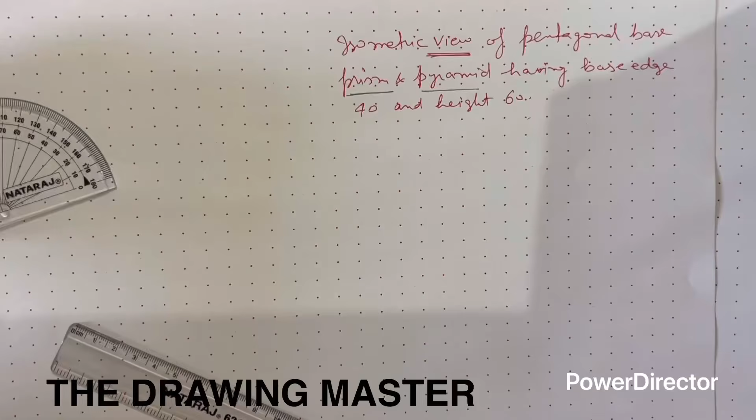Hello friends, in this video we will discuss isometric view of pentagonal base prism and pyramid having base edge 40 and height 60. So we will draw the isometric view, not projection.

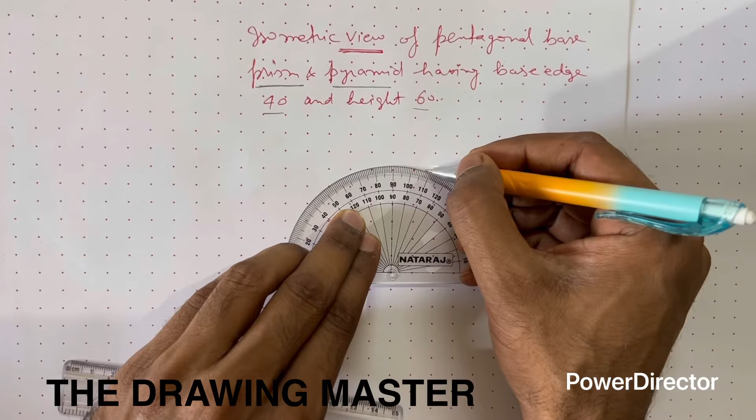So let's measure the angle. This is 90, 100, 105, 6, 7 and 8. Measure this angle very carefully. Right? This is 108 degrees this side. You can draw one thin line here. Similarly from here, now we'll draw the same angle.

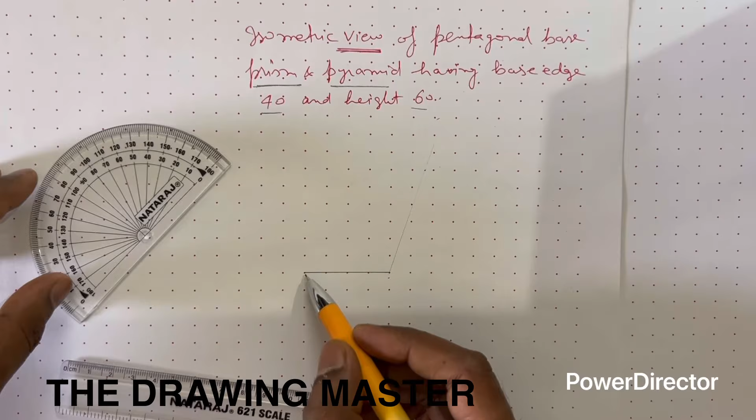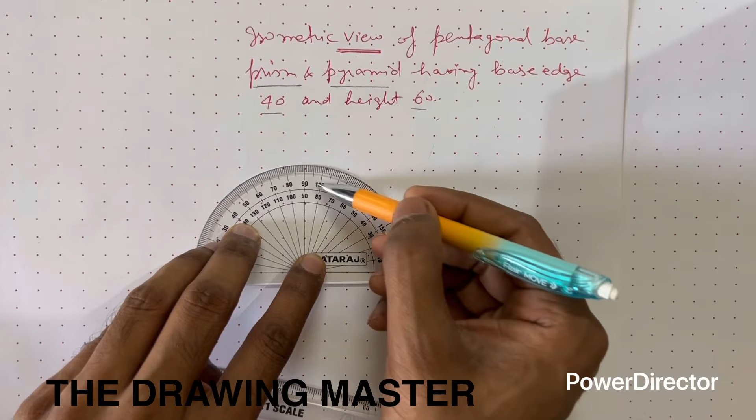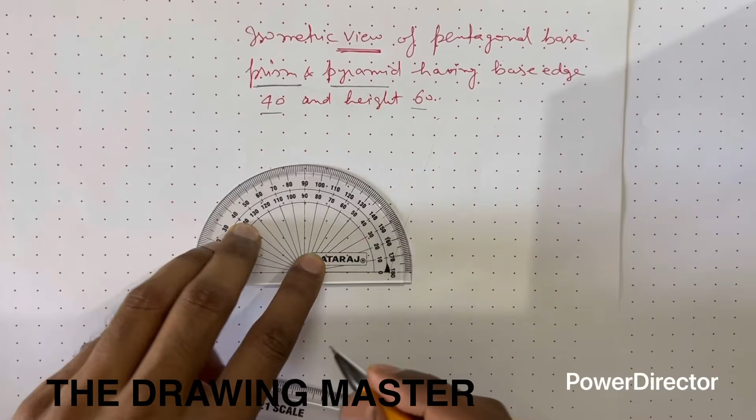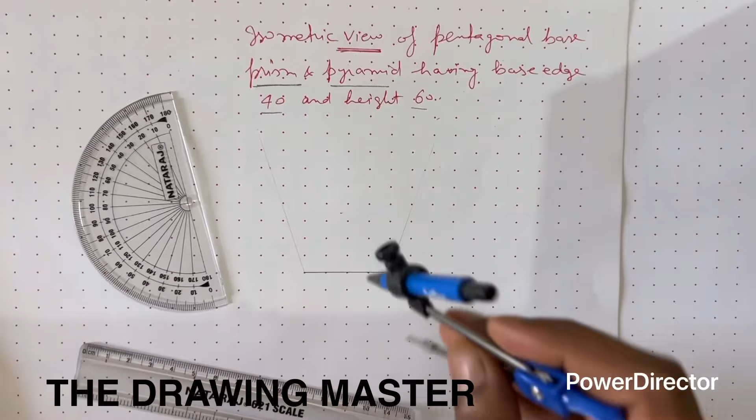Set your protractor at the origin. So now this is 0, 90 degrees, 100, 110. So just 108 we need. Right? Here also you can draw one thin line. Now for a regular pentagon, all the sides should be 40 mm and all the angles should also be the same.

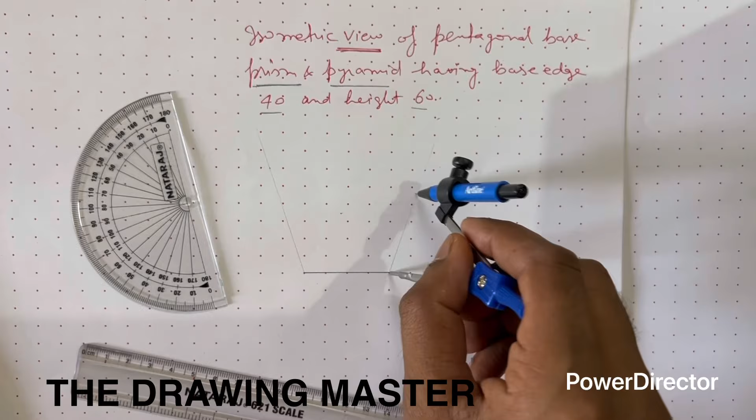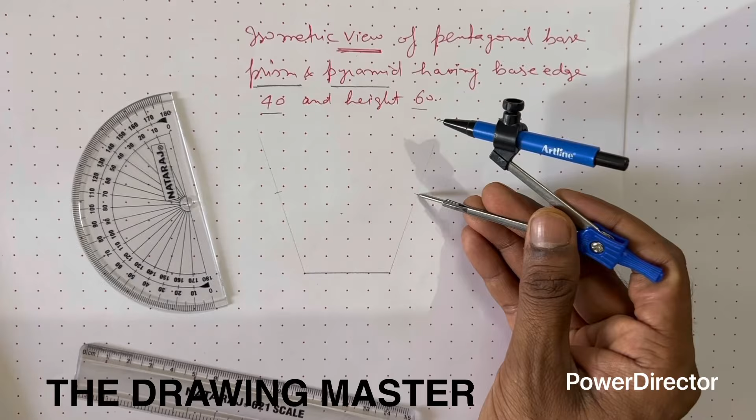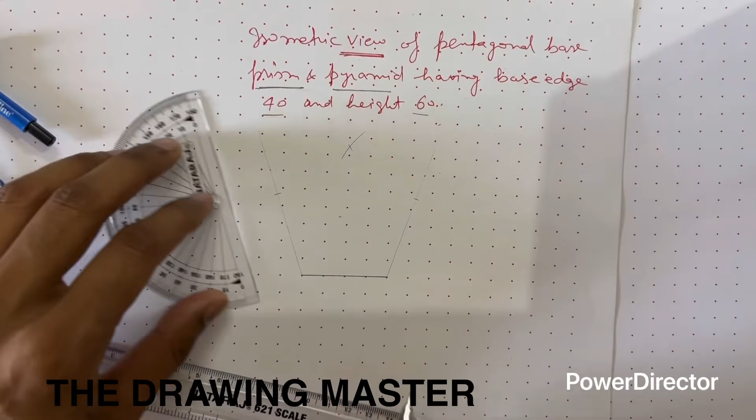This is 40. From this side, take 40 on this line and 40 mm on this line. This is 40, 40 and this is also 40. Now from here also we need 40 mm. So take an arc of 40. And from this intersection take 40 mm. Now you can join all these points. You will get a regular pentagon of 40 mm.

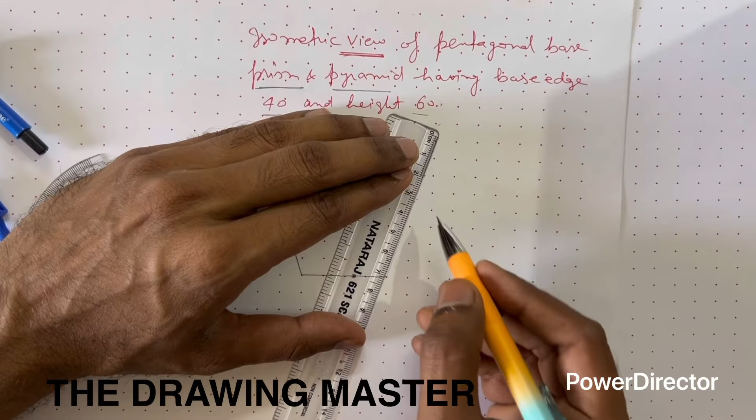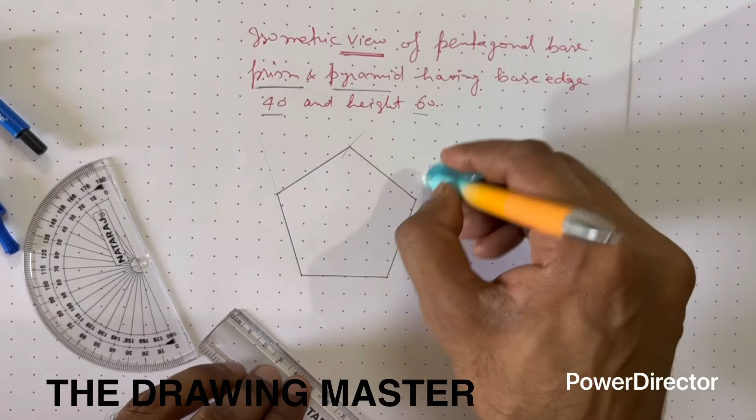Now this is the regular pentagon. All the sides are equal and all the angles are equal. This is the 108 internal angle.

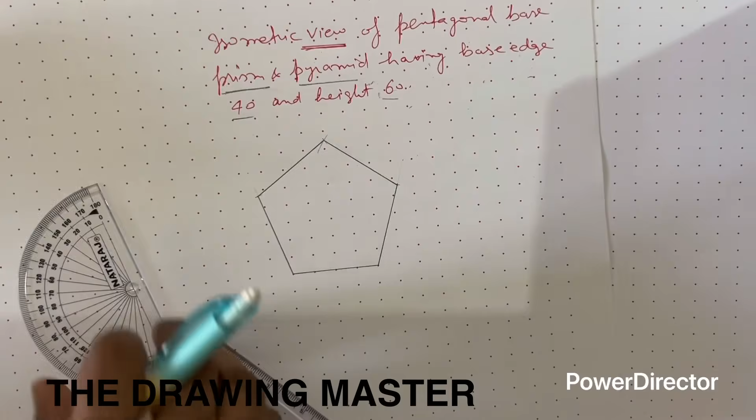If you want to verify your pentagon, you can just rotate your sheet and verify it from all the sides, like from this side, from this side, from this side. From all the sides it will be the same, or symmetrical about the vertical axis. So you can see this is a correct pentagon now.

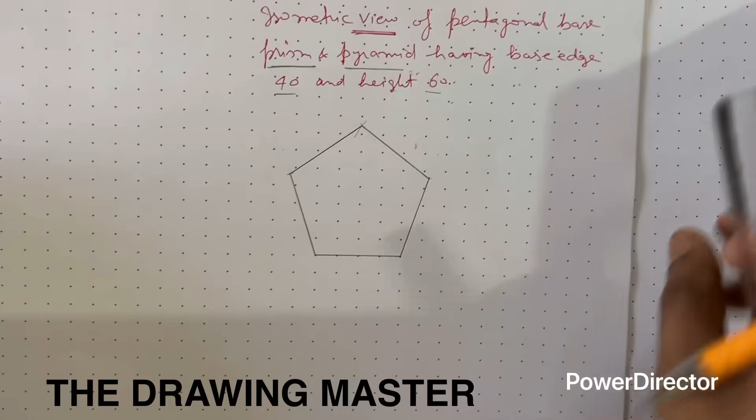Now the second step, enclose this pentagon into a boundary. So here there should be a vertical line. Just draw one vertical line on both sides. You can take the help of the dots to draw the vertical line, because if the lines are not vertical, your frame size will be incorrect.

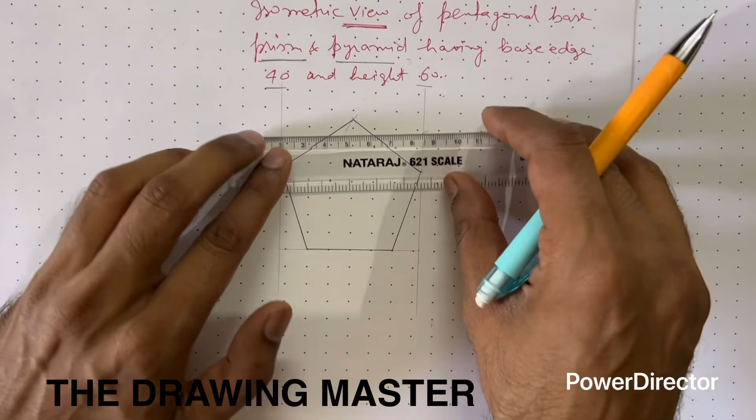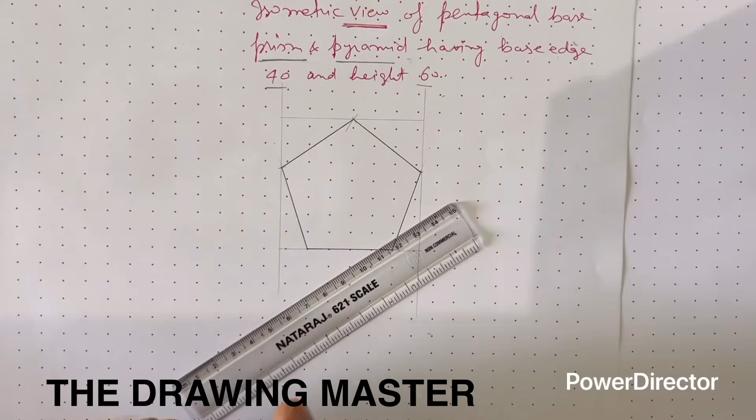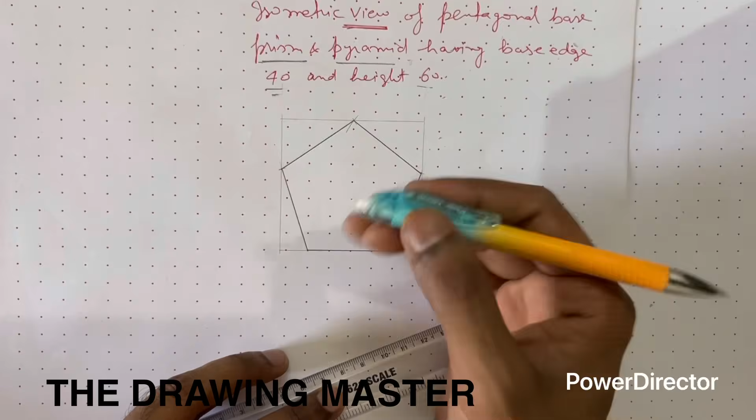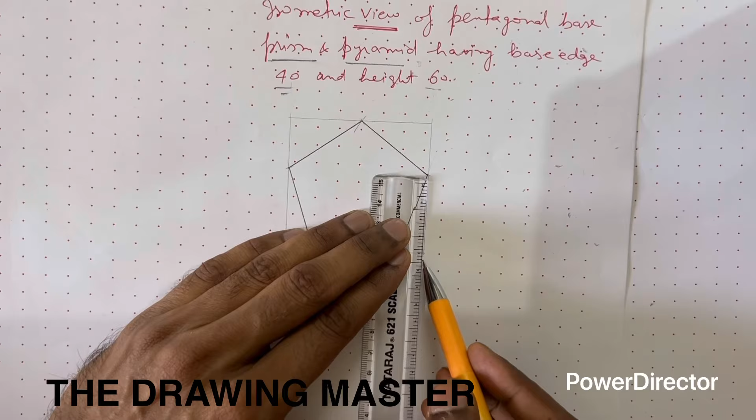So this is the boundary of 4 sides. In the case of a pentagon, there are 5 sides, 5 edges, but now we have enclosed this into 4 edges. Let's measure the size also. This is the third step. Take an extension line, draw the dimension line, measure the dimension. So this is 65.

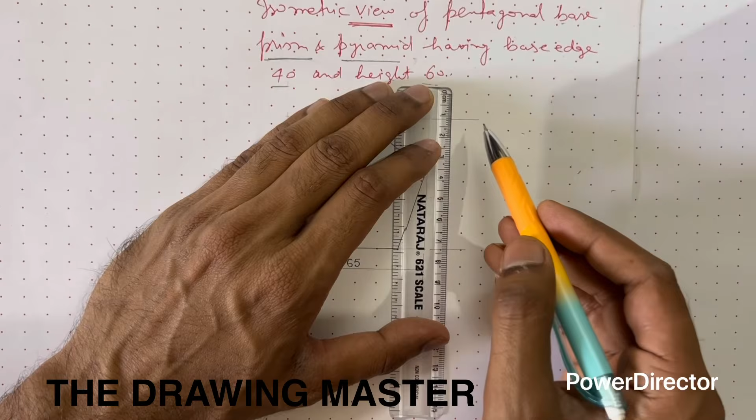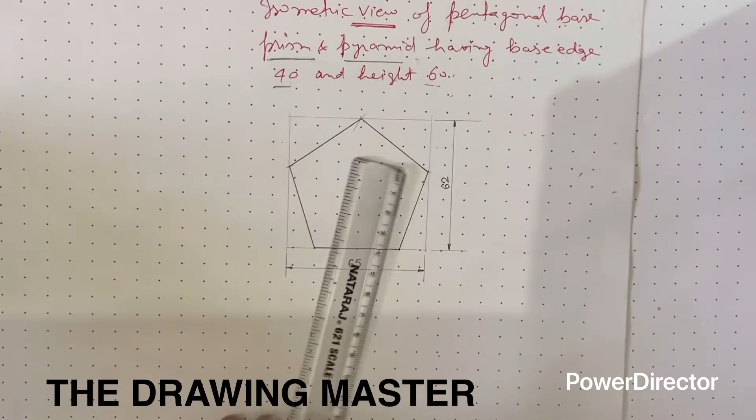So here you have to write 65. Now measure this second dimension. So this dimension is 61.5. So we'll round it to 62, because maybe there is some error, so we'll take 62. In manual drawing this amount of error will be there. So this is 65 and 62.

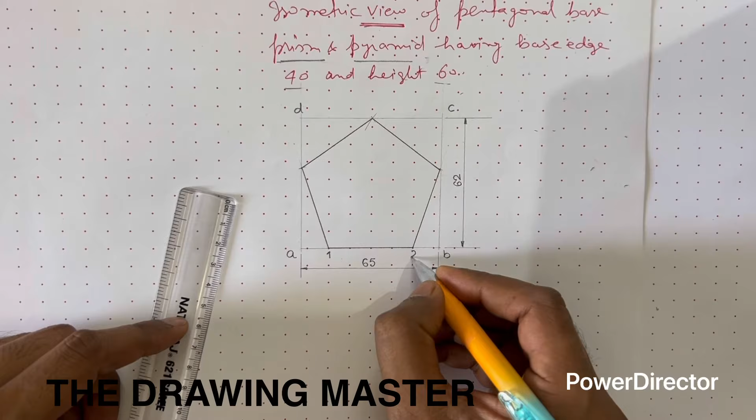Let's write the names of all the corners: A, B, C, D. Now we'll label the 5 vertices of the pyramid. This is 1, 2, 3, 4, 5. These are the 5 vertices of the pyramid. Now the isometric view will start.

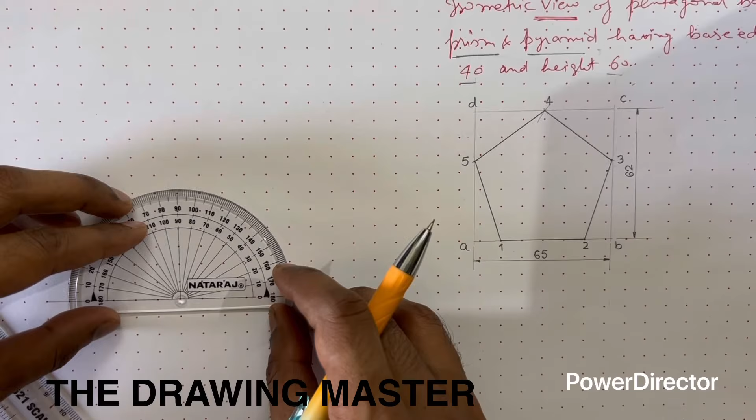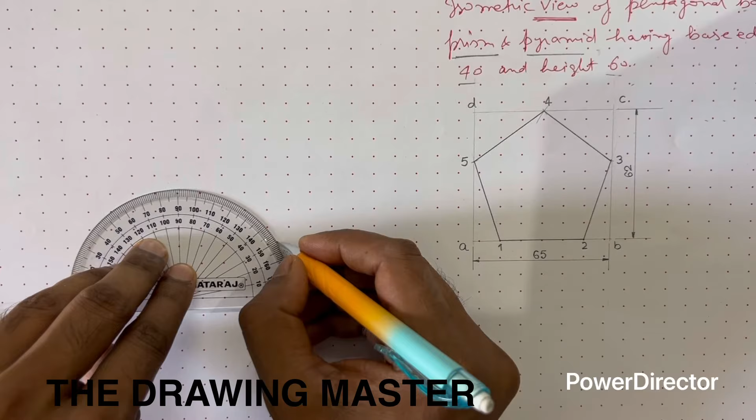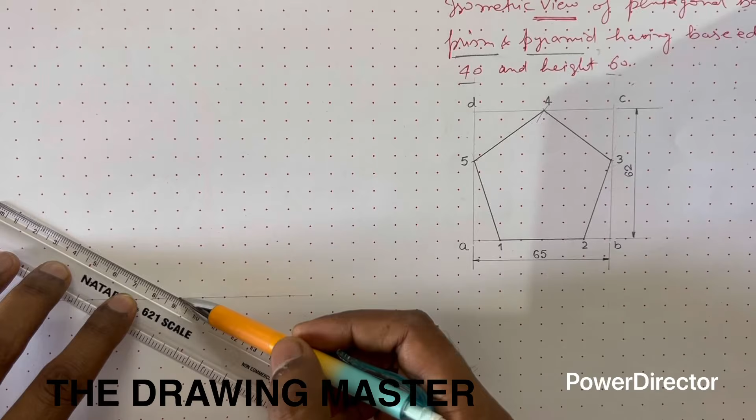So for the isometric view, first we have to draw the reference line. Take one pole point. As usual, like other drawings, you always have to draw 2 lines at 30 degrees on both sides. 0, 10, 20, 30, and similarly 30 degrees this side, right? These are the 2 isometric lines which represent the length and width of the object.

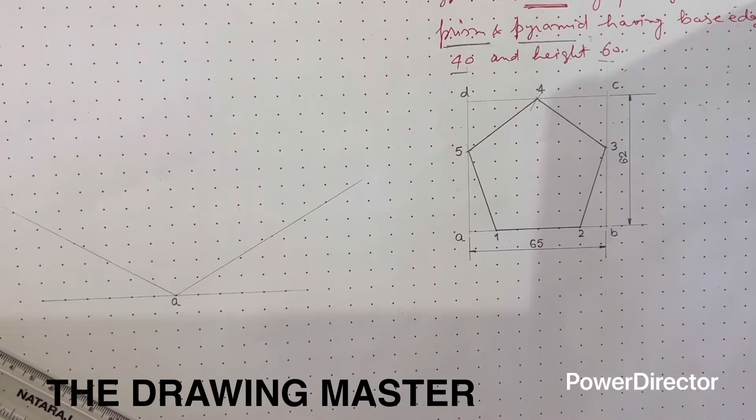So now we'll convert all this drawing into the isometric view. So how to convert this? Let's fix point A as a pole point. So if this is A, here we should have B. So let's measure the dimension AB.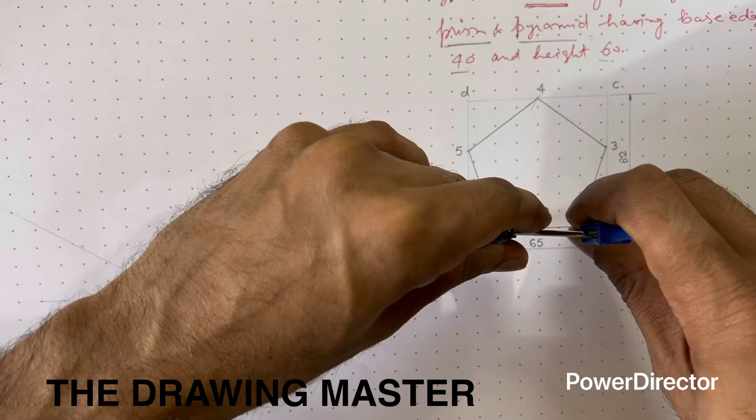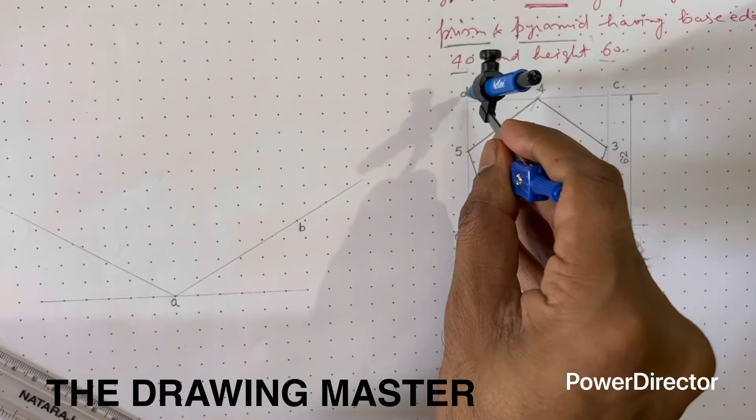This is B. We have transferred the B. Now AB is done. Now we want to draw AD. We have to draw AD. So let's measure AD. AD. Now this is point D.

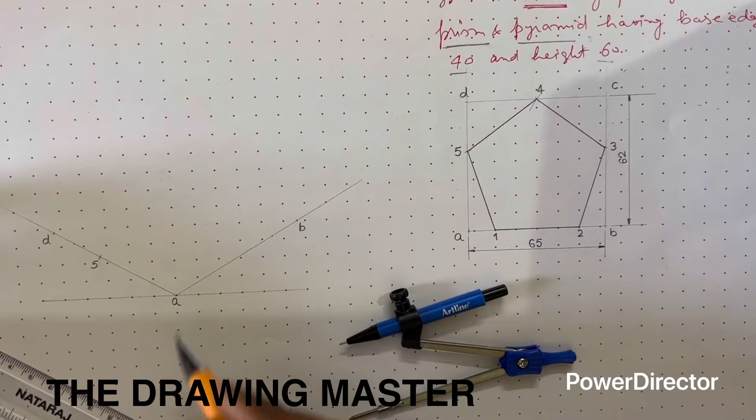One more thing is there. You can also transfer A5 from A. You can measure A5. So let's write here. This is D and this is 5. Right? Similarly here we will transfer 1 and 2.

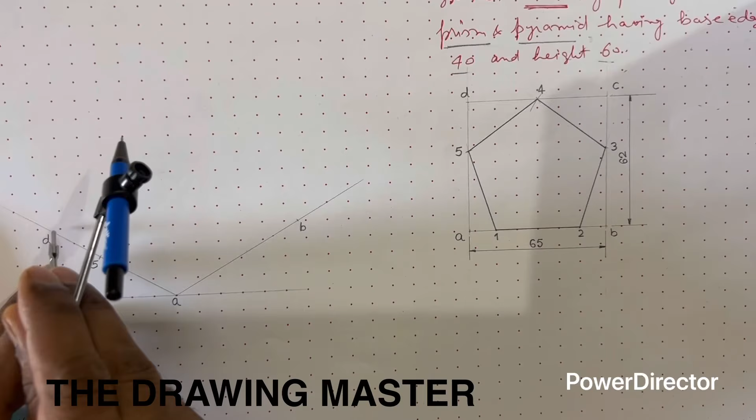Let's draw the next point, C. DC. So DC, we will copy it from here. DC is 65. DC. So take an arc from D. Now on this arc, point C will be there.

Now we have to draw BC. To measure the dimension BC. So from B, take an arc. Now you can join this. Now this is the line BC, BC 62 and DC should be 65. This is 65.

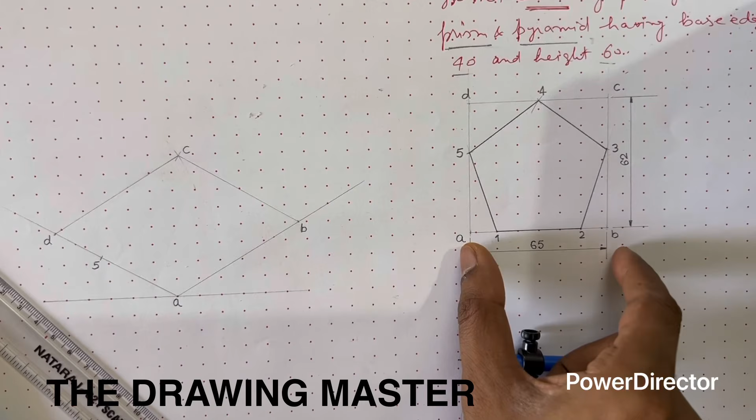Right? AB, here it is equal to this line. AD 62, this is 62. Then DC 65, so here it is 65. And BC is 62. So basically we have transferred all the dimensions here at a 30-degree angle. Now let's transfer the points. So point 5 we have already marked. Let's mark the point 3. So point 3 is lying in between B and C, somewhere here.

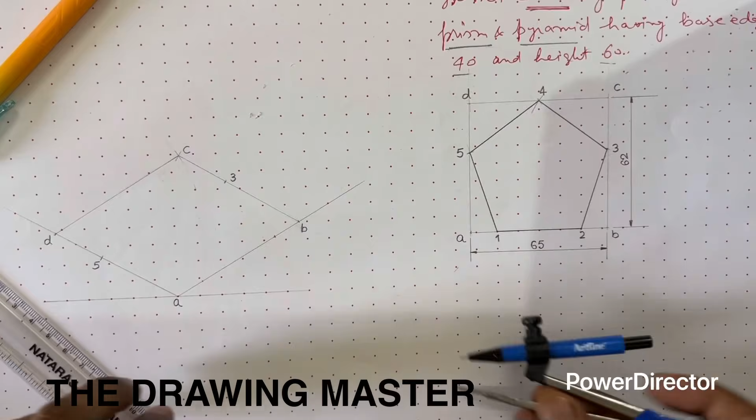So let's measure B3. B3. So from B we have marked the point 3. Let's write here 3. Now A1 and 2B both will be equal because both the side angle and dimension are the same. So A1 and 2B both will be equal. So copy this dimension A1. Now A1 and 2B. This is 2. Same dimensions, same points we have transferred, we have located here.

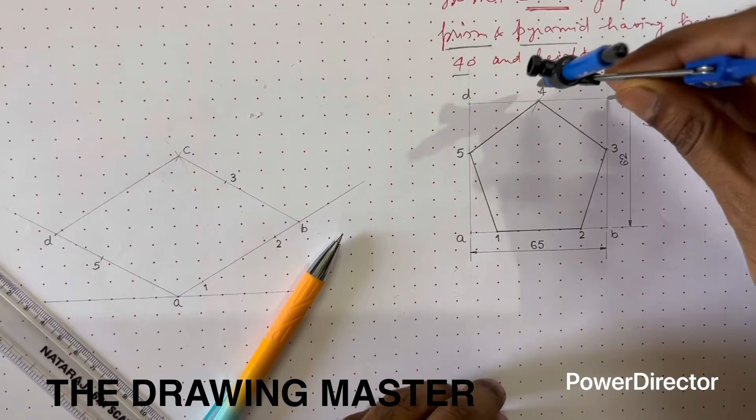Now point 4. So point 4 is at the midpoint of C and D. So you can measure it from either C or D. So now this is C4. So this is point number 4. So now we have located all the points. So finally we will join all the points to get the pentagonal base. Initially we'll follow the thin lines here. Once the outline of the object is confirmed, then we'll use the thick lines.

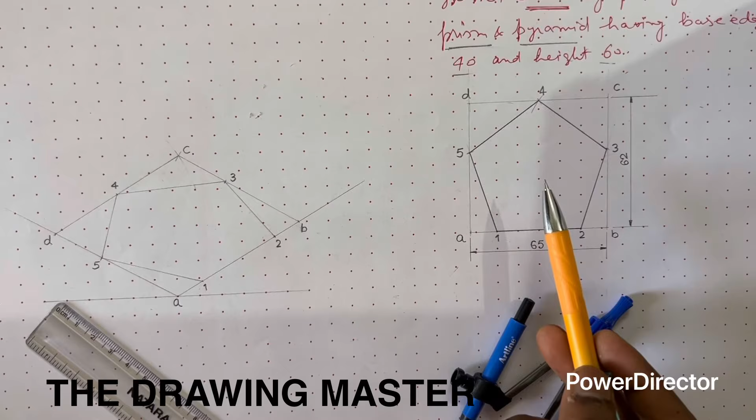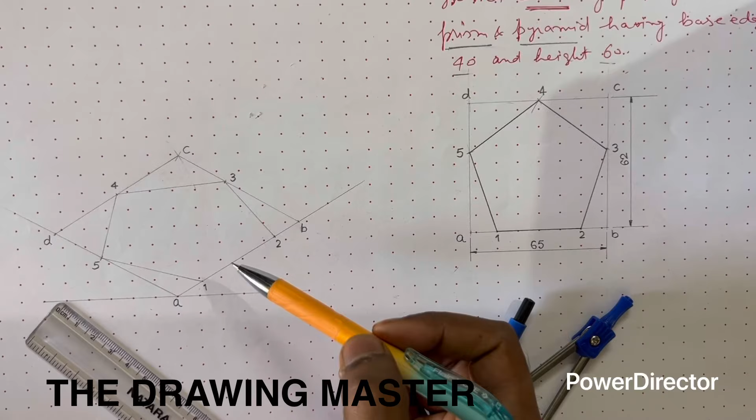Now you can see this is the top view of the pentagon, 2D view, and this is the isometric view of the pentagon, same pentagon in isometric. So now the next part of the question is prism and pyramid. So if you want to convert this into a prism, you have to take the vertical height from all the 5 vertices. But if you want to make a pyramid, like a pyramid of Egypt, then you have to take the height from the centroid.

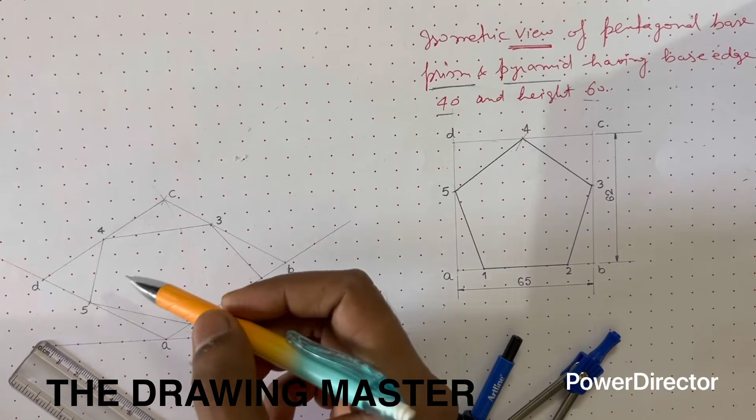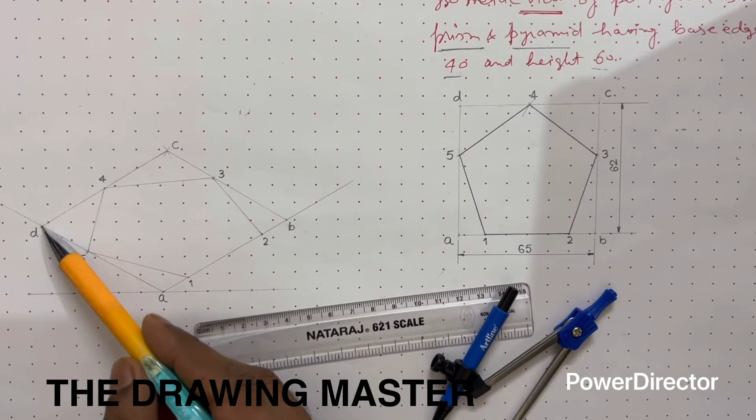So let's see how to find out the centroid. To find out the centroid, you can bisect any 2 lines. See, sometimes we think if we join the diagonals of the isometric view of this rectangle, we'll get the centroid. No, that is incorrect. In that case, we'll get the centroid of the rectangle. Even that is not a correct presentation of the centroid. We'll see how to find out the centroid of this pentagon.

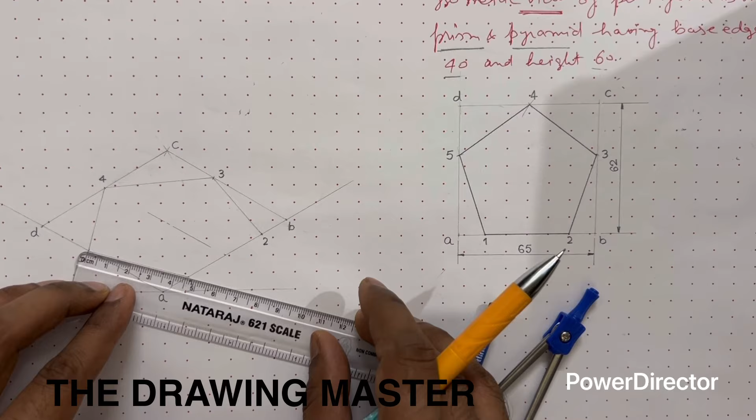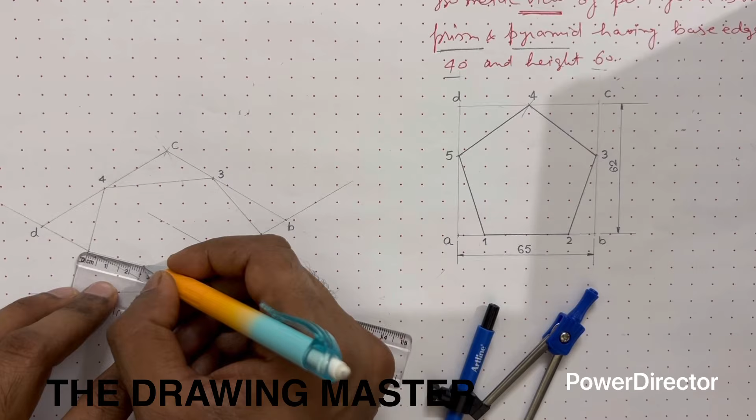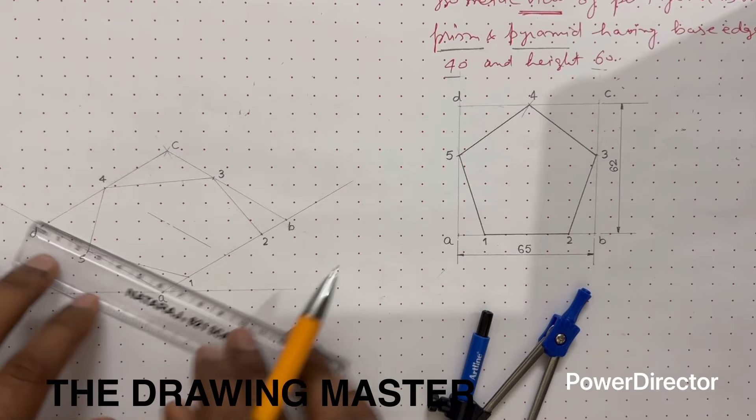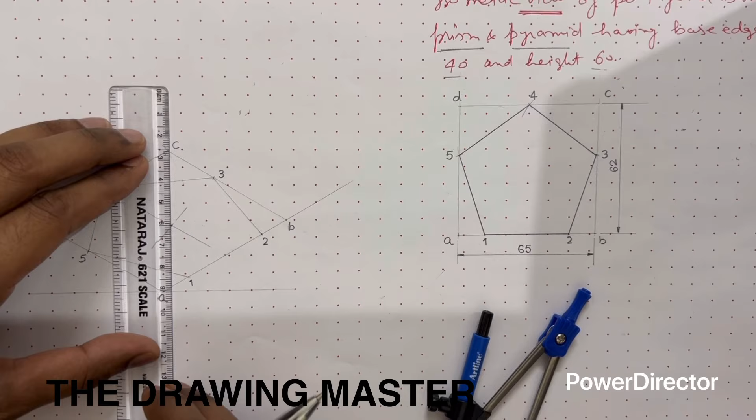So half of 46 is 23. So here is the midpoint of this line. This one is the midpoint. This dimension is 46, so half of 46 is 23. So in the isometric plane, draw one perpendicular here from 3. Now this is the centroid of the pentagon. From this centroid we have to take the height. So now the height is 60. So you have to draw the vertical axis of 60 mm here.

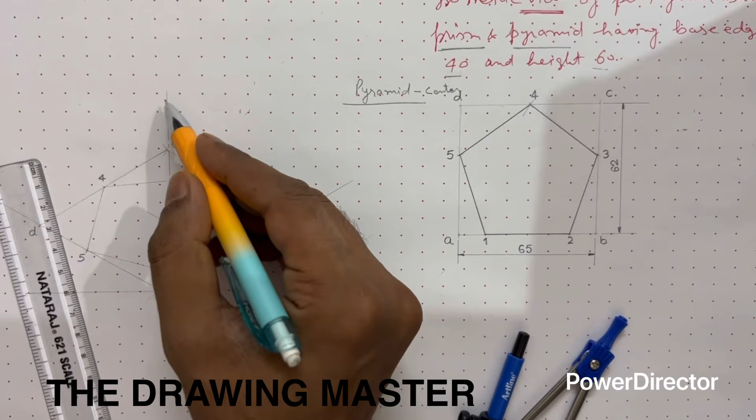So now if you want to make a pyramid, take the height from center and join the apex with all the 5 vertices. Join this apex with this 4, 5, 1, 3 and 2.

In case of prism, you have to take the height from all the 5 vertices. So let's take the height of 60 mm from all the 5 vertices. See, here you have to be very careful while taking the line. Don't get confused. The line should be exactly vertical line. This is 60 mm height.

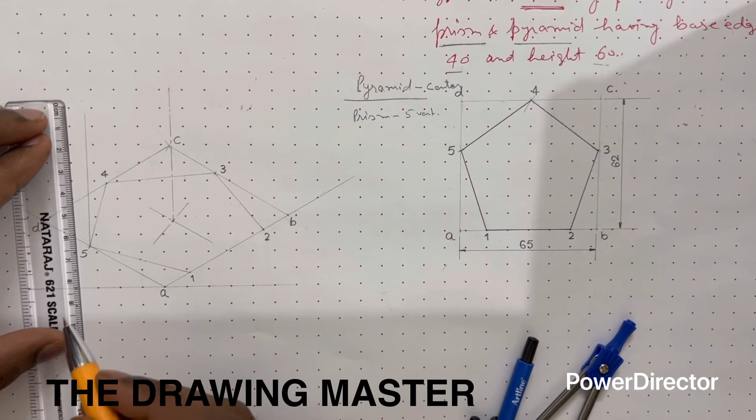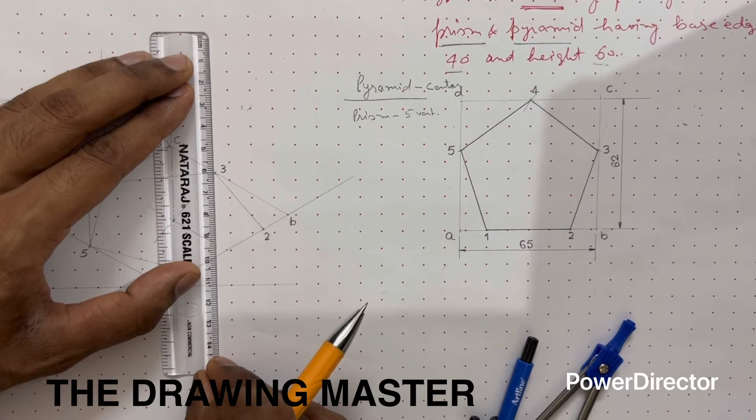Now point number 4 will take the 60 mm height. Align your scale with the dots. If you are making these lines with the help of drafter, then you have to set it only once. 60. Now from here you have to take 60. You can see here I am spending few seconds here because I know if one line is incorrect, all the object will become incorrect.

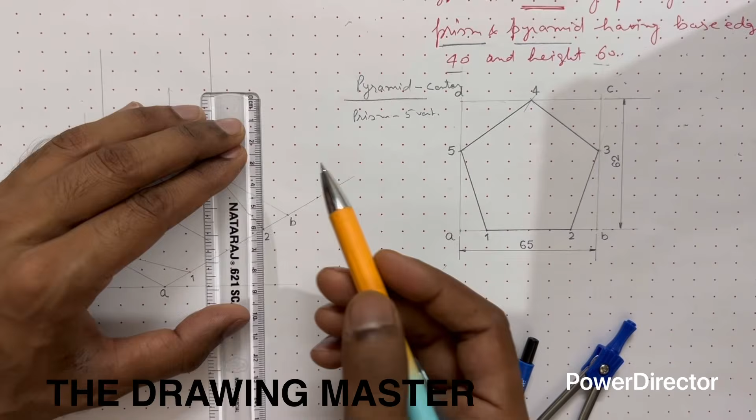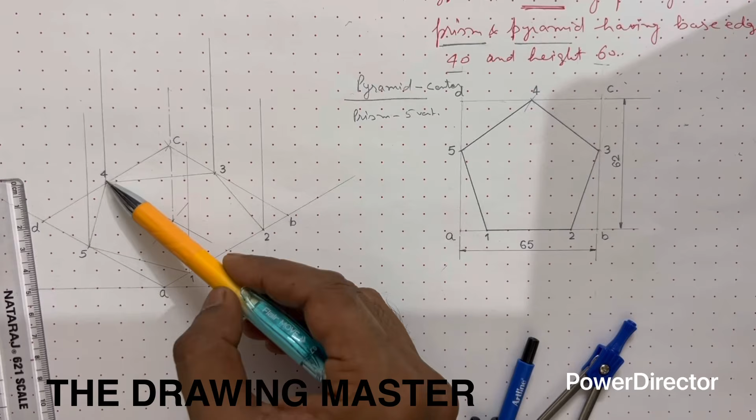Now, just like a construction of building, you can see the heights here. Have you seen the construction of building? So just similar to that, these are the 5 columns of the construction. This is 1, 2, 3, 4, 5, and this is the centroidal axis. So if you want to make a pyramid, join this apex to all the vertices. But if you want to make a prism, join all the endpoints. So I will make the prism here, pentagonal base prism.

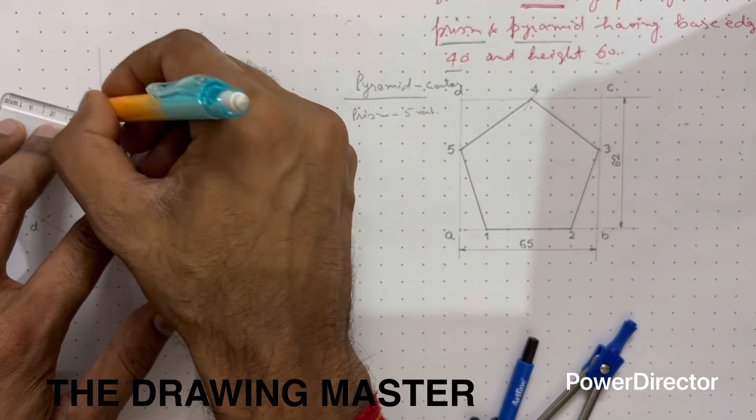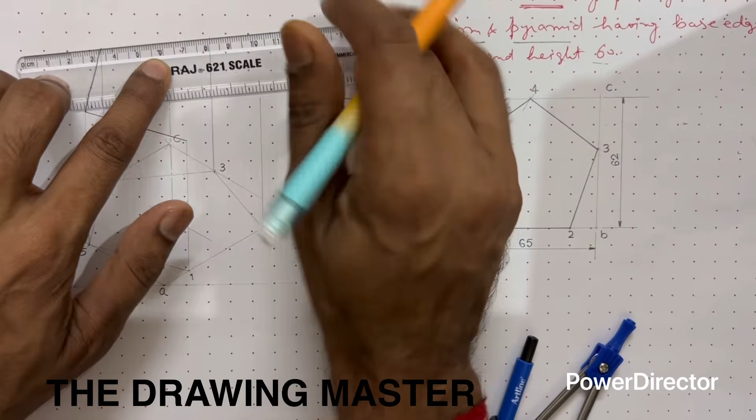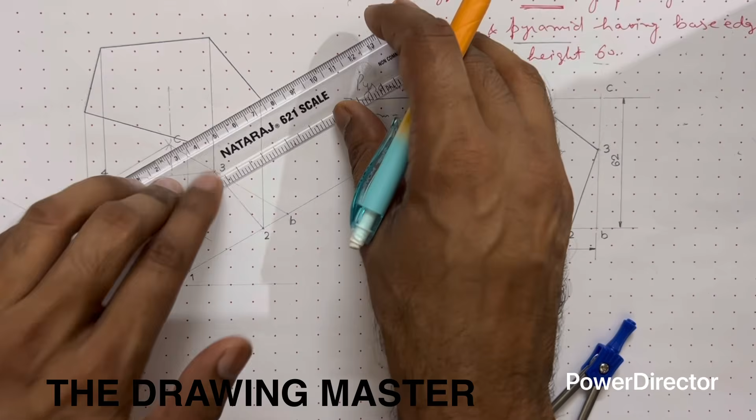At the height of 60 mm, you will get the same pentagon now. Now this is the pentagon at the height of 60 mm. So we'll convert the outlines in the thick line. The visible outlines should be continuous thick line.

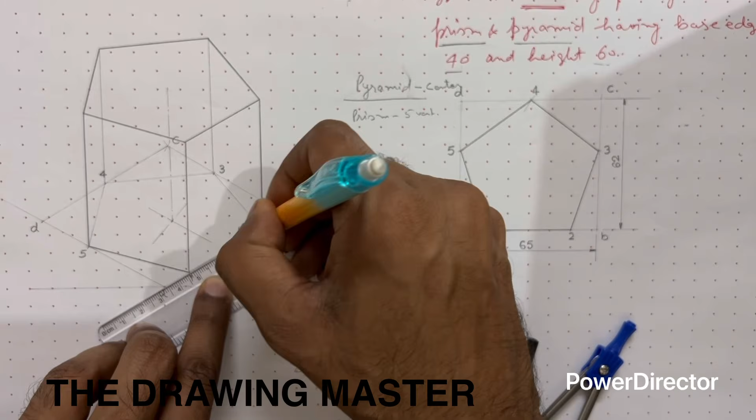Now this is the isometric view of pentagonal base prism. So dimensioning is also very important here. This dimension AB and AD we have already mentioned here. So we'll write this dimension 40 mm. So place your scale at 30 degree.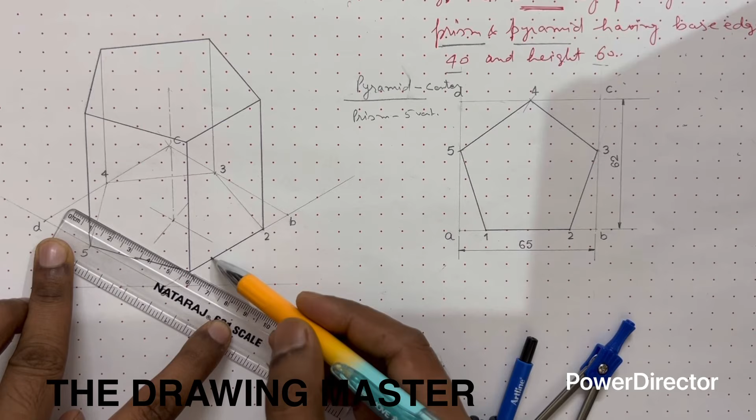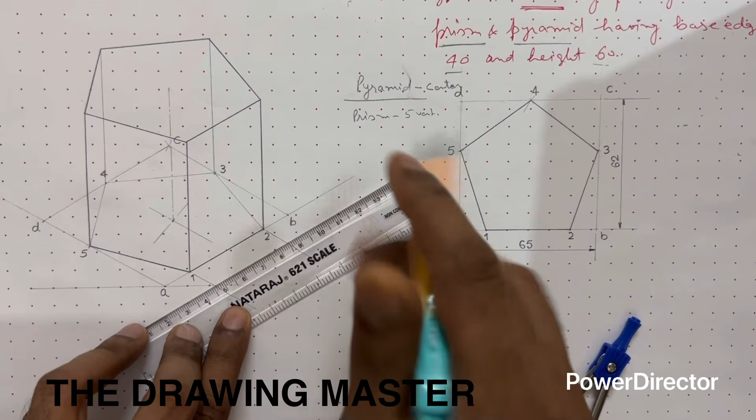See, based on my experience, I have aligned this scale with this line that you can see through this transparent scale. So most probably it will be 30 degree. If you are unable to draw, then you have to measure this. With respect to this edge, it will be 60, right? Now the scale is parallel to this edge, which is already at 30 degree. Now dimension line should be parallel to the object line. This dimension is 40.

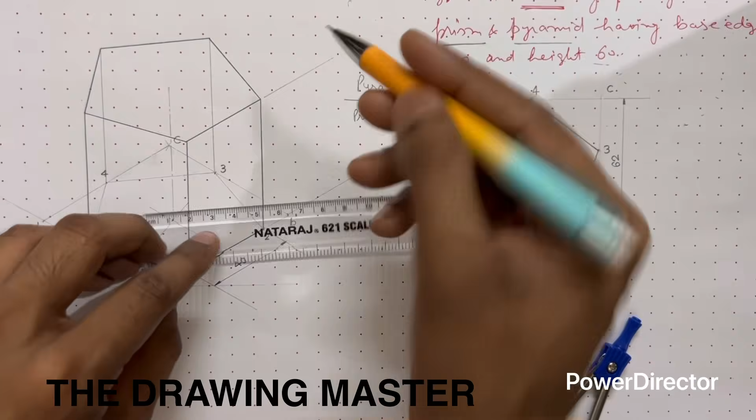So if you want to write the height, this is the vertical height, this is already vertical line, and this edge is already at 30 degree. This one is already at 30 degree. So here you can take the extension. Now this is the dimension line. You have to remember extension line and dimension line will be always at 30 degree. And height will be always vertical line.

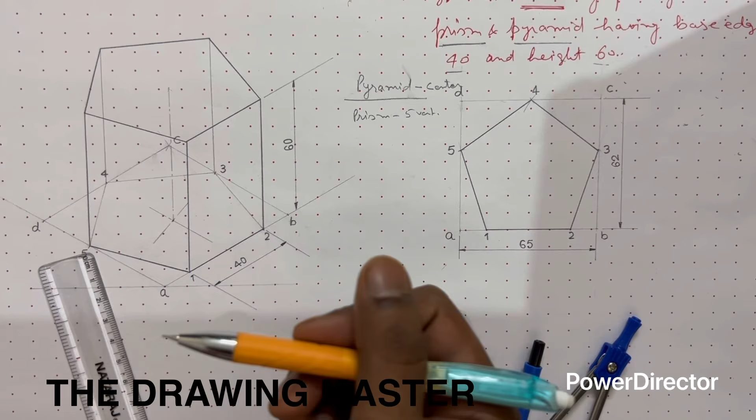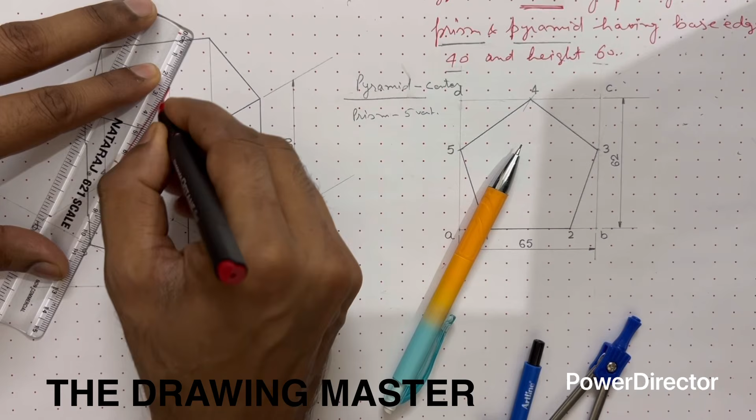So let's see the pyramid now. I will show you pyramid with the help of pen. You can see the pyramid now. I will join this apex with all the 5 vertices. Now we'll join it with 1. Now we'll join it with 2.

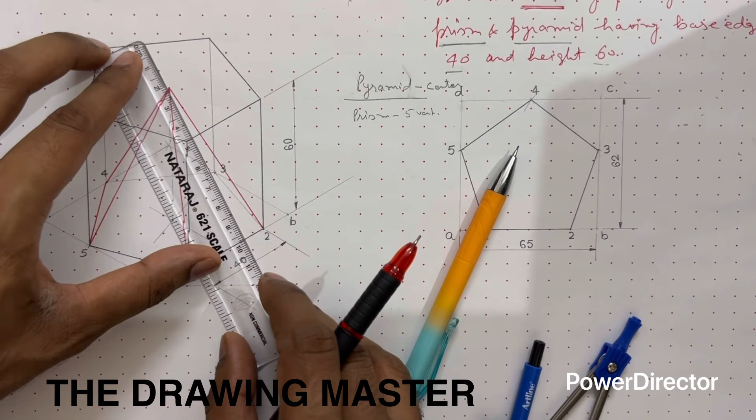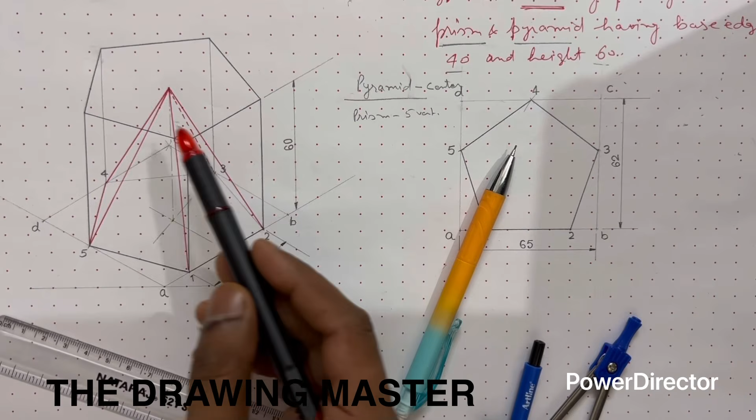O3, this will be hidden. So basically we are not using the hidden line, but just for your understanding, I'm showing you the hidden edge here. This edge will be hidden here. So now you can see this is the isometric view of pentagonal based pyramid. Right? It seems that a pyramid is enclosed into an isometric view of pentagonal prism.

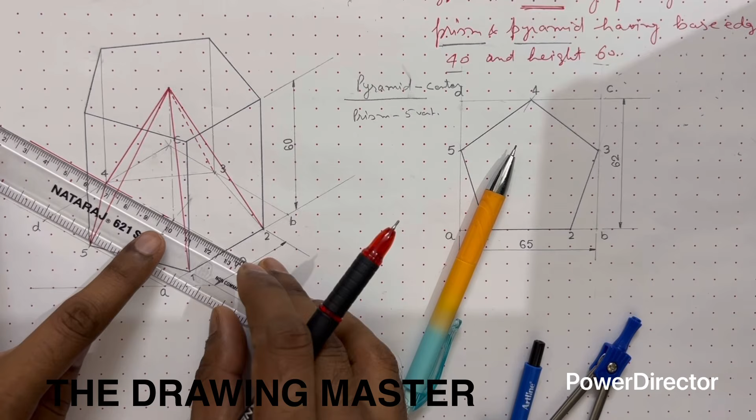So last point is the height. How to write this height of the pyramid? In case of pyramid, you can see this is the start point of the height, centroid. This line is already at 30 degree. Take 30 degree extension. Take the height of 60 mm now. And join this apex with the dimension line.

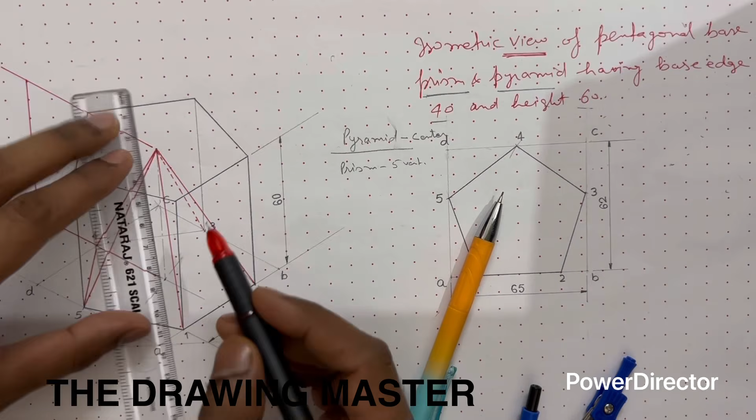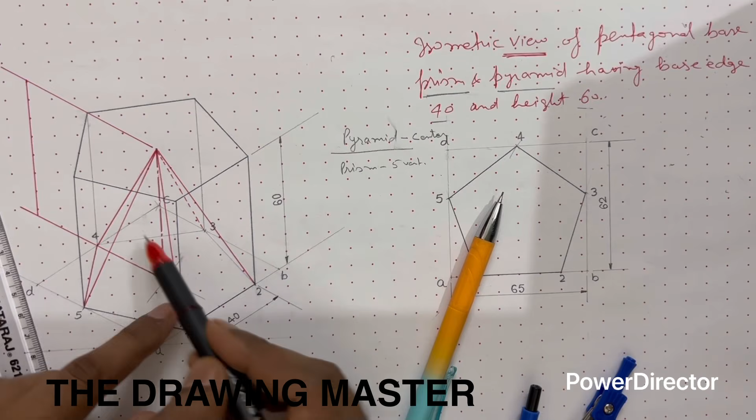See, you have to remember one thing here. Let me show you the red color. The axis and dimension line with 2 extension lines, it will always be a parallelogram. You can see dimension line, vertical axis, and 2 extension lines. It will always show you a parallelogram. So here we will write the height in case of pyramid. This height is 60.